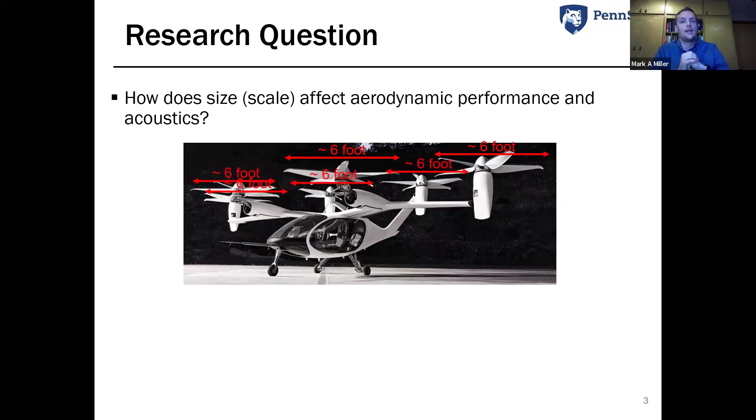If you only have one 6-foot rotor, these are a lot smaller than the typical single main rotor helicopter that we've been studying for decades. And if you just think of it as being a 10 times smaller rotor, it might not seem that complicated. The issue is that you not only have one, but many rotors, and they're all interacting, and that can lead to a lot of aerodynamic complexity.

Things like interactional aerodynamics, where you have one wake being ingested by another rotor. You can also have a lot of unsteadiness in the flow from dynamic stall of multiple rotors, and those wakes can be interacting as well. You can also have things occurring like transition on the blades, and that can change depending on the size that you build your rotorcraft system at. And all of these are going to be in some way or another affected by Reynolds number.

We've decided to really focus in on eVTOLs because it is a bit of an unexplored design space. There are a lot of different configurations out there, and they're all really interesting, I think. I'm a fluids aerodynamics person, so all this complexity has us excited, but there's also a lot of unknowns.

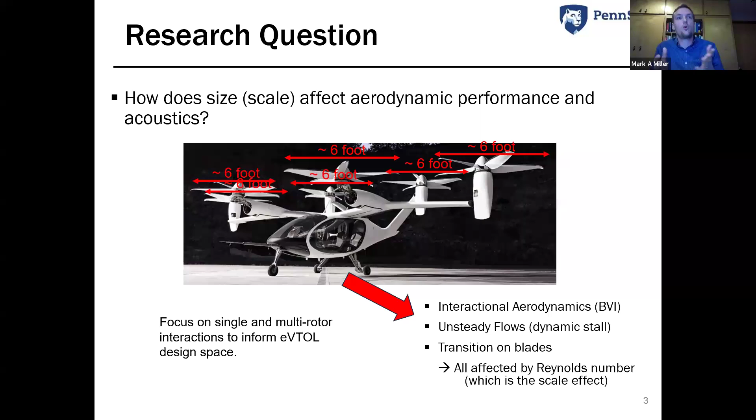So our goal here is to really explore the design space, maybe provide some insight into how the aerodynamics change as you go, especially from model, which is easy for us to build and look at in the lab, to full flight scale. That's the question that we want to answer today. Okay, so that's our motivation.

This is a really brief overview of what I'll be talking about: a little bit about the scaling background and why we're doing what we're doing, and also introducing our new facility. So we'll jump right into that.

There are many things that we want to match when we go to do an experiment. And experiments are very expensive, so we want to match as many as we can, depending on what our objectives are. The three main ones for single main rotor helicopter testing and eVTOLs as well are going to be Reynolds number.

So that's what people typically will call the scale or size effect. Mach number, so these will drive, if you have a high forward flight speed, and also will drive the acoustics that the aircraft generates.

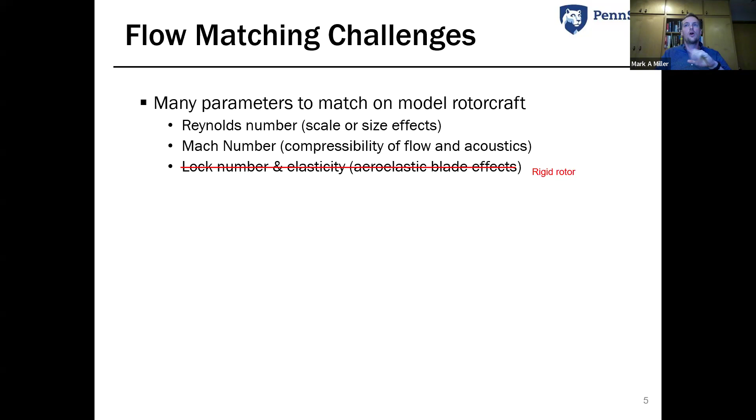And then we're also going to be, if you're doing especially large single main rotors, dealing with things like blade elasticity, lock number, so the inertia of the blade. Today, we're going to simplify because we have limited time, and we're going to focus mainly on rigid rotors for eVTOLs.

If you look back through the literature, this is not exactly an unknown challenge. The Singleton paper from over 20 years ago points this out quite well: it is not possible to match full scale tip Mach numbers and Reynolds numbers if you make a model and test it in air. It's just not physically possible. And even earlier, Keys mentions that if you do have a Reynolds number issue, this is going to be the primary cause of difference between hover performance and model test data.

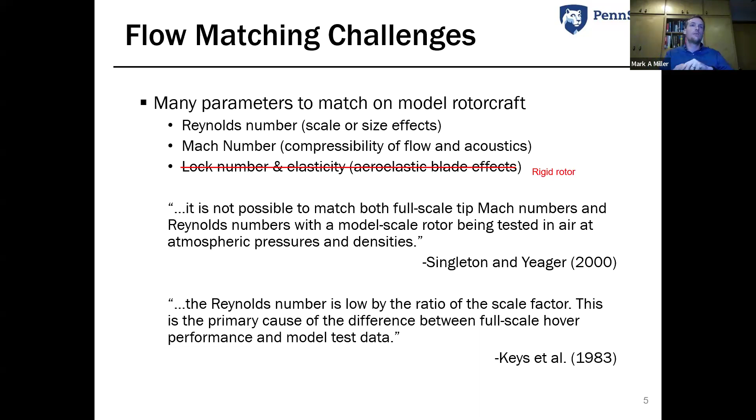Today I'm going to be talking a lot about hover and some limited axial climb cases. These are very relevant to us and well known in single main helicopter rotors.

Okay, so if you're looking at this from a non-dimensional perspective, we're going to have just two main parameters today: Reynolds number and Mach number. Here written in terms of the rotor's important parameters: omega is our rotation rate, R the radius, C the chord. And then we have our fluid properties, rho and mu, and the sonic speed, A.

The problem, as pointed out by previous authors, is that you can't match these simultaneously because they're coupled through omega R, which is just the velocity at the blade tip. If you rewrite Reynolds number, it's just going to be a function of Mach number, your chord, which is a function of the size of your helicopter, and your fluid properties. So we're kind of stuck.

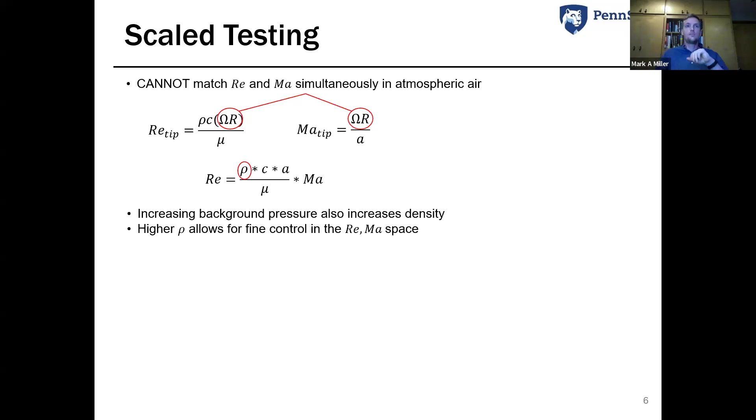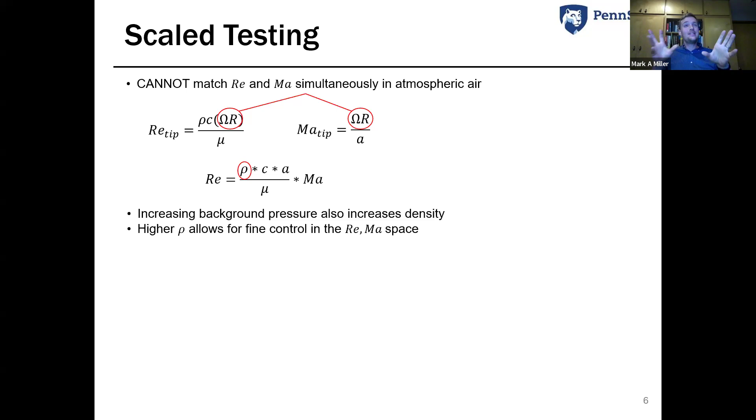And that Reynolds number issue always persists—if you imagine shrinking a rotor down 10 times, the chord has to shrink 10 times too. So you still have this 10 times smaller chord, which causes a problem for Reynolds number, unless we can do something else. If we could somehow change the fluid properties, maybe increase the density while keeping viscosity the same, which is what we can actually do in compressed air, we can now tune Reynolds number completely separately from Mach number. That's a nice tool to have in your pocket.

So just to ground this: let's say we have a little 18 centimeter toy-sized model, and we take that carefully designed model and put it in a high pressure environment. So we increase the density, we increase the pressure—you can think of this like effectively increasing the diameter. If we took that little 18 centimeter model and put it in 6 atmospheres of pressure, a tank full of air with this rotor stuck in there, that would actually be aerodynamically the same as testing almost a 1.5 meter diameter rotor.

And this continues to go up—if we go to 34 atmospheres, that would be about a little over a 6 meter diameter rotor. So for a very low cost, small scale facility with some pressure and a few compressors, we could get much larger equivalent full sizes. Whenever you see pressure or density increasing, you can really think about that as effectively making the rotor bigger aerodynamically, even though we're physically using the same size model. Hopefully that makes sense.

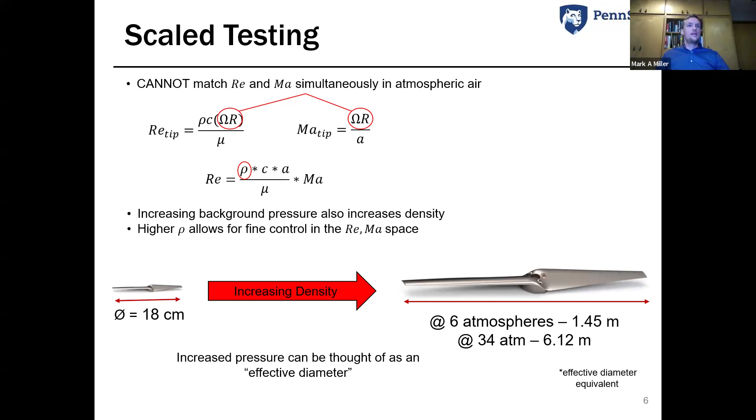And again, this is not exactly a brand new idea—I'll talk a little bit about that as well. But to our knowledge, we're the first people to try this with compressed air. This allows us to achieve proper scaling on the rotor, and we'd like to generate some of these comparison data sets. Unfortunately, we don't have a lot of results yet looking at these interesting eVTOL configurations, but that's coming.

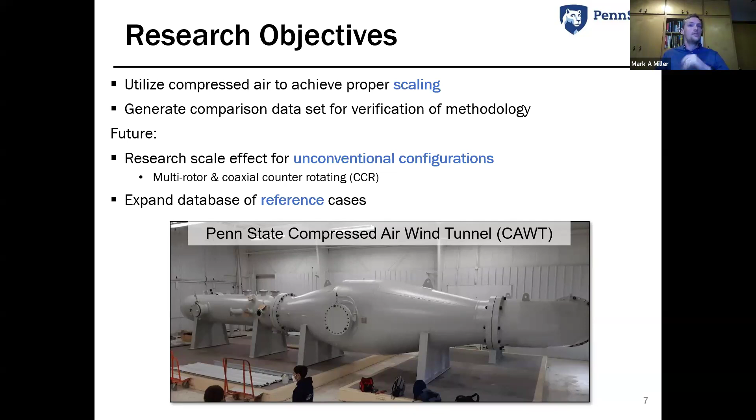We're actually working right now over the summer testing multi-rotor and some coaxial cases. This ability to do these unconventional, strange or unusual configurations is really nice in the lab because it's a lot lower cost and cheaper. This is a facility that we're going to be using to do that, and I'll talk about it on the next few slides.

And the way we run this, it's not a high-speed facility. We actually just fill it with compressed air, and then we circulate the air around in a loop. So it's a single return wind tunnel.

You can kind of see from the students here working on the tunnel, it is, for a university, a fairly large-scale facility. That's nice because we can put fairly large models into it.

Now, all that being said, with our about 1 meter diameter test section and the velocities that we can get, about 45 feet per second-ish, and I'm switching back and forth between units, we can get about 34 million Reynolds number per meter or 10 million per foot.

So, okay, great. Those have million in them. They sound like big numbers. So I thought I would throw one simple example. Let's say you just had a little 25 millimeter, 1-inch airfoil, and you put that inside the tunnel. That would have a Reynolds number of 850,000, which is 34 times what it would have at atmospheric pressure.

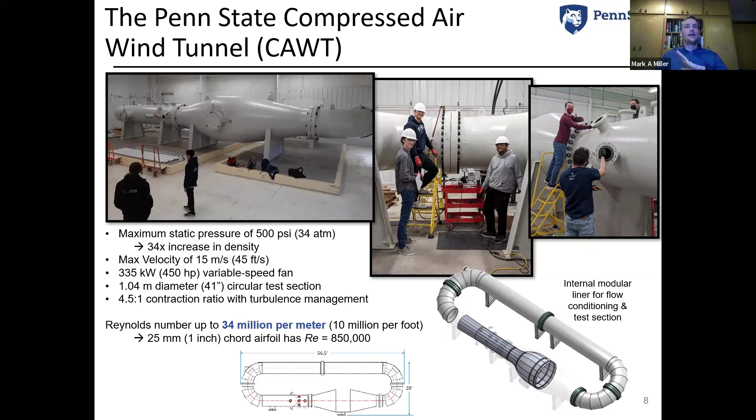So very high. I also thought it'd be interesting if I threw in an example more related to rotorcraft. So let's not worry about rotation yet. Let's just say I take an example large-scale rotorcraft, and I want to shrink that example down so I can study it a little bit more easily in the lab. So I want to take something that's on the order of 15, 16 meters long and make it about a meter long. So it's still a pretty big model, but very reasonable to do in this size facility.

Now, if you wanted to know, let's say, the drag on this fuselage in cruise, at full scale you would need a Reynolds number to match this condition of about 82 million. Now, if you made this 1 meter model and tested it just in atmospheric air, you would only get a Reynolds number of a little under 1 million in this particular case.

However, if you compress the air, we have this 34 times multiplier, right? 34 atmospheres of pressure, then we would get the same order of magnitude Reynolds number as full scale. And that's without using high speed. We're just using pressure to get that, really. So this hopefully highlights the utility of using pressure.

The other cool thing is we can get any scale in between there. So we can go up to something that's really close to full scale, or we can go to small scale, and with the same model, by changing the pressure only, we can basically simulate any size in between. So I kind of call it a spectrum of scales, if you want to think about it that way, going from small to large. Hopefully that makes sense.

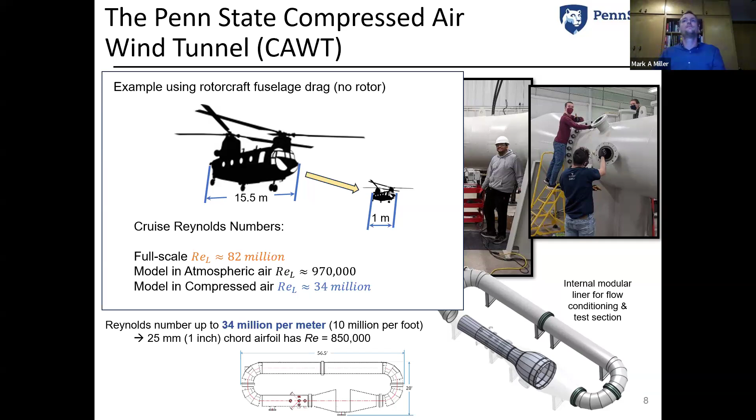Here's just a peek. I know I put a lot of pictures in here, like I mentioned. This is just inside the tunnel. We have a fan, it does spin. We have a test section, like I said, about 1 meter, just with some instrumentation shown. Kind of a look through the contraction.

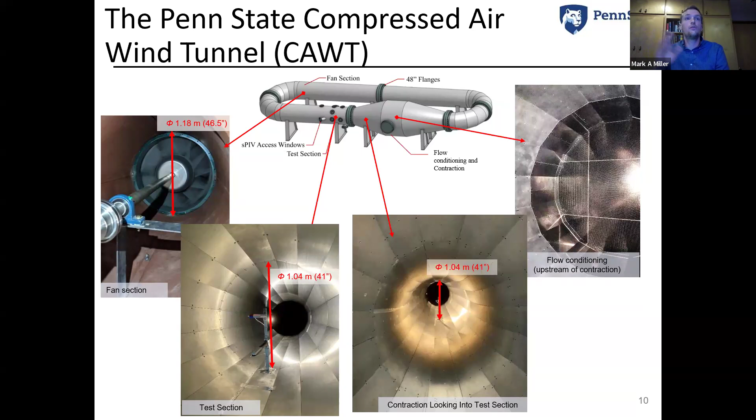And this is all inside the pressure vessel, right? So we've built all this hardware to make sure that the flow is uniform, low turbulence, like a usual wind tunnel should be.

Okay, so let's take a look at some data. We're going to mainly be focusing on experiments that were performed in the test section. We have done some other things. I'm happy to talk afterwards if you're curious about some of the other work we've been doing.

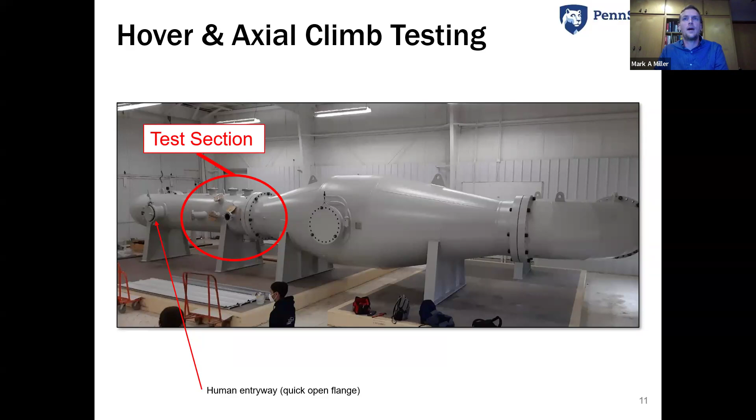If you're also curious about how we get inside, we actually have a little hatch over here, and you have to kind of shimmy your way inside, but you can easily fit, and actually you can easily stand up in this section, which is about 8 feet here. So it's quite a large facility.

So this is the rotor we're going to be looking at. The whole goal of this work, and like I said, this data was taken this year, so this is still very new. And this concept, we wanted to verify it first.

So we took this relatively simple rotor geometry, and I'll explain why we picked this in a second. It's just a 2-bladed, fixed pitch, machined, high tolerance machine aluminum rotor. What I want to point out is it's exactly scaled, so the chord to radius ratio is the same, and the airfoils are the same as full scale.

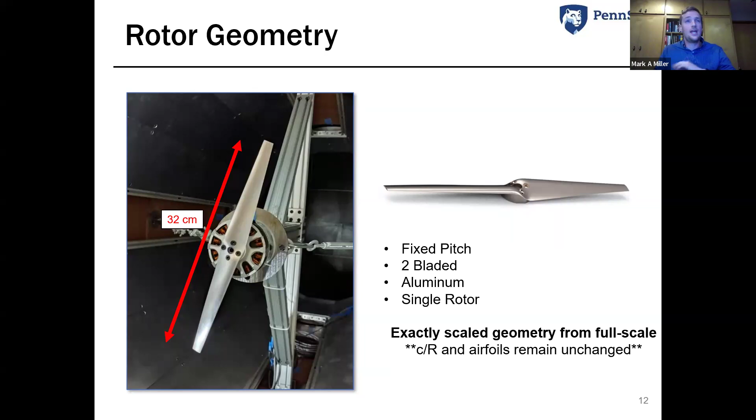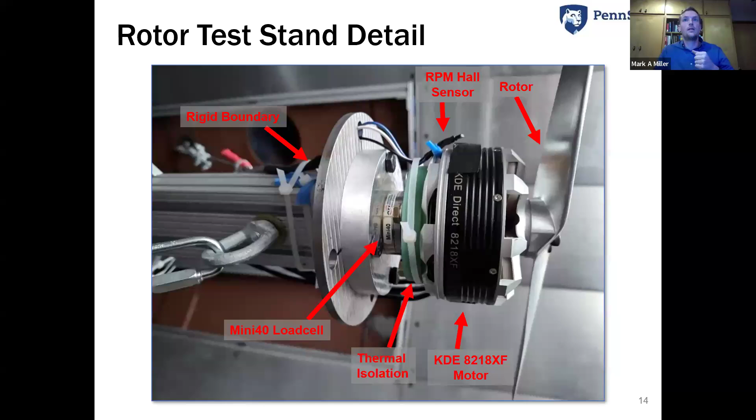This is a picture of it in the tunnel with our test stand. We can measure tunnel velocity, and it's about 32 centimeters in diameter, roughly. This is just a look at our load measurement apparatus. We have a motor that spins the rotor, and we have a load cell that measures the reaction torque, and that allows you to get the power and the thrust that is generated or required by the rotor.

So why do we pick this rotor? There was a good reason. This is actually a NASA project that funded the original development of this rotor, called Dragonfly. And the goal of this project was to build this pretty unique large drone to fly on Titan, which is one of the moons of Saturn.

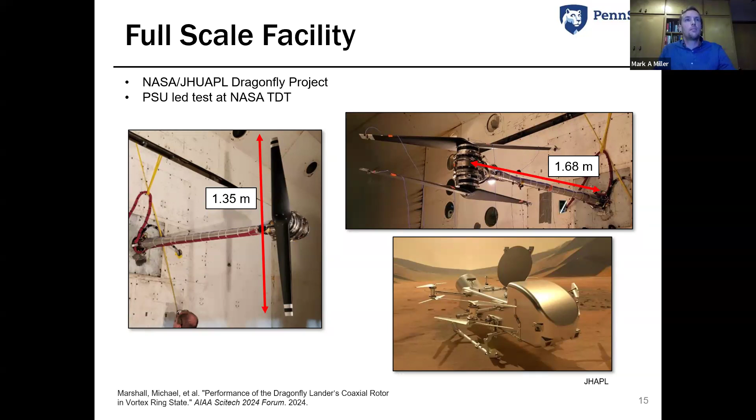And it's a very high density atmosphere there, so it's actually a perfect case for a vertical lift vehicle to very easily generate a lot of lift without a whole lot of rotor. And they did a lot of these tests of this rotor geometry at the NASA TDT facility, and it's all available. So there's not a lot of data for coaxial rotors that's publicly available with a known rotor geometry, so that was why we picked this. They also did a lot of tests with just the single rotor, so it kind of is the perfect comparison case there. They only really tested one of these multiple coaxial configurations.

So let's quickly look through the full-scale data set that's already available. Like I said, they tested all of these different configurations at the NASA Transonic Dynamics Tunnel, and they also tested, which was really cool for us, in 2 different gases. So like I said, we're not the first to think of this heavy gas changing the fluid properties. NASA's known about this forever, since the 30s at least. But they have refrigerant, which has its own benefits, but it's heavier than air, and depending on the refrigerant you use, you get a different boost in Reynolds number.

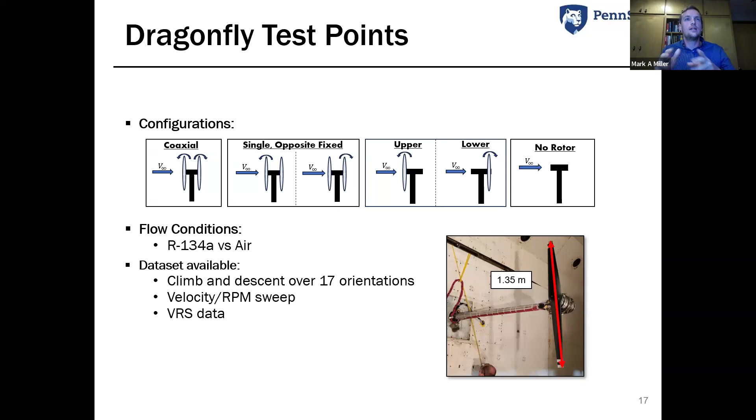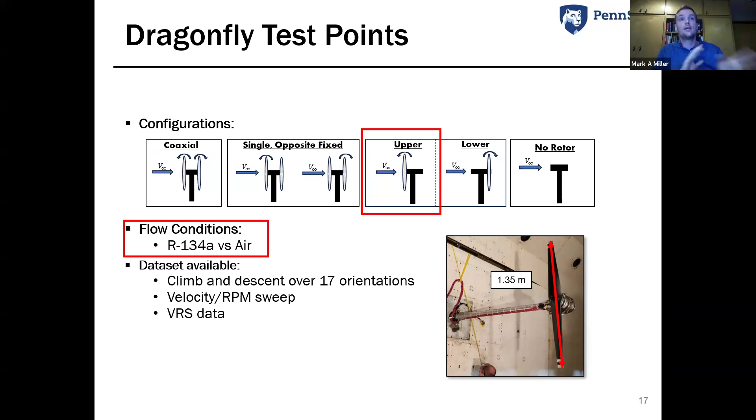Today, we're just going to be focusing on really the single rotor case, and then they tested both in air and in heavy gas. So we'll be looking at their data for this one rotor in both of those and comparing it to our case. So let's dive into that.

Before we look at any actual results, I wanted to orient you with respect to the operating space. So down here on the x-axis, we have Reynolds number, and this is just kind of an idea of the scale that's most relevant to the rotor. So it's calculated at about 75% out from the hub, and that's just kind of dynamically relevant to the blade boundary layer. We can have a whole discussion about Reynolds numbers and why you should choose them, but that's for another time. So we assume that to be the most dynamically relevant.

And one of the interesting side notes, it actually doesn't matter what Reynolds number you pick when you exactly scale the geometry like we have. But anyways, I won't get on a tangent on that. I'll just mention that up here on the leftmost axis, we have Mach numbers. So each one of these points represents an operating point that they tested in the TDT.

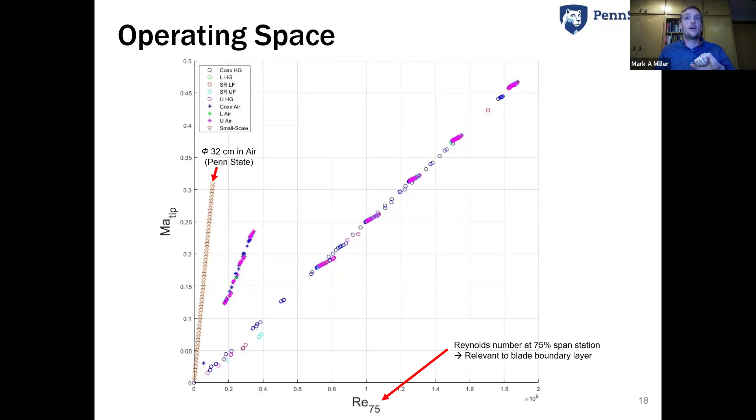And then we've also added in these kind of triangles here where we could operate just at atmospheric air. So if you have a 32 centimeter model, you would see you'd be very limited in your Reynolds number range. We wouldn't be able to even get close. No matter, you could keep spinning this rotor faster and faster, and you still would be very limited, and then you'd be getting into some Mach number effects.

Now, if we also add on the NASA data, so this is the 135 centimeter rotor they tested both in air, so this is kind of the in-between points here, and also the heavy gas.

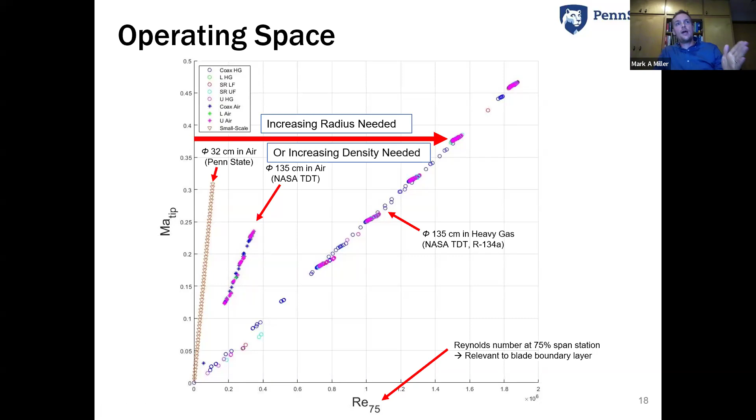You can see that increasing the density of the fluid really does give you a big boost in Reynolds number. That's the only difference—actually the same rotor, just in these two different configurations. As you can tell, to move from the left to the right on this operating space, you really need to either build a bigger rotor or have a higher density working fluid.

So what we can do is, now that we have this pressurized facility—one more note, if you're wondering why these all kind of fall in the same vertical line, it's because all they're doing is increasing the RPM. So each one of these vertical lines is just an RPM sweep, but we've non-dimensionalized everything.

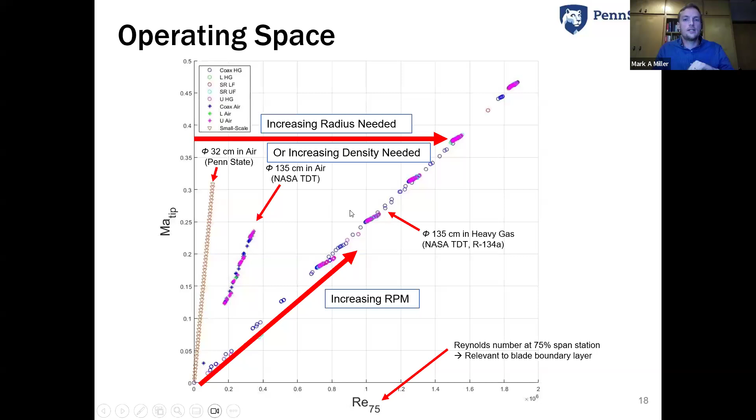Okay, so if we're now going to look at the Penn State facility, what you can see is each one of these lines is actually an increase of 1 atmosphere in pressure. So we're just literally opening a valve, filling another atmosphere, about 15 PSI of air into the tank. And you can see, by doing that with this same model, we're able to actually span a huge range of Reynolds numbers and Mach numbers. This is, like I said, only the background pressure being changed.

And you can see we need about a little over 4 atmospheres to get the 135 centimeter rotor, and about 11.5 atmospheres to do the heavy gas, which is very easy for us. This is actually like the low end of our capabilities.

As an example of that, if we were to pressurize to the max, which is 34 atmospheres, this would be the same as testing an 11-meter diameter rotor, which really you couldn't do except maybe in the world's biggest wind tunnel, the NASA Ames NFAC facility. Like TDT would not be big enough for a 36-foot rotor. So hopefully this kind of highlights where we're able to operate and why.

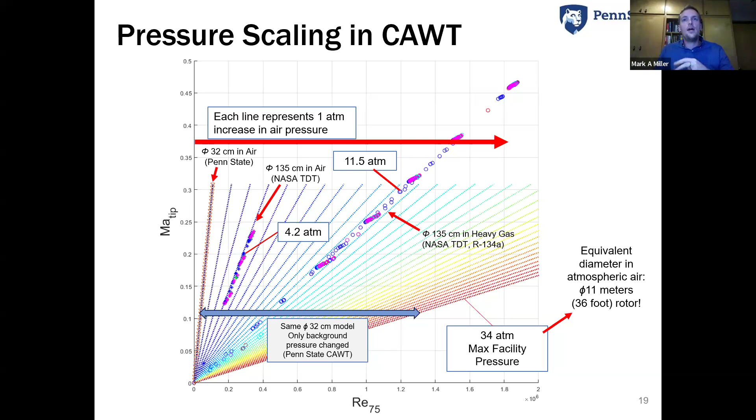And I'll quickly dive into some hover testing. I'm going to throw this data up really quick, and then we'll talk about it. It's a little bit different.

So now we're looking still at Reynolds number, Mach number on the X and Y axis. But what I've done is plotted points, and each one of those points has a color code that corresponds to the thrust value. So this is non-dimensional thrust, which is how we have to compare everything non-dimensionally. And you can see here, each one of these lines is, again, a different pressure, so from 1 to about 10 or 11 atmospheres.

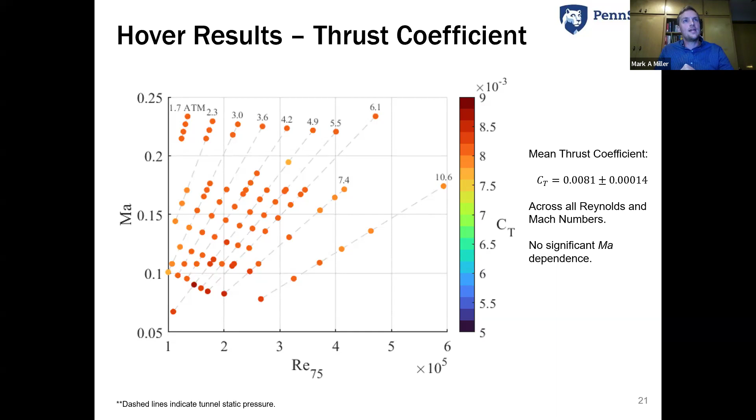And what's interesting is there's actually not a lot of change here. So if you were hoping to see big scale effects to validate the use of this facility, they're not evident, at least in thrust. We also don't really see much change with Mach number as you go from the bottom to the top of this plot. There's not a whole lot of difference here. I'll talk about that in a second and why that's actually what you would expect based on some basic theory.

Now it's a little different if we look at power coefficients. So this is basically how efficiently your rotor is able to produce power, or how much power your rotor takes, right? What's interesting is that the story is a little different here—at low Reynolds number.

So on the left of this plot—I'm not sure if you can see my cursor or not, I won't get too crazy with that—but on the left side of this plot, you can see at low Reynolds number we actually have much higher power that is required. We're up here kind of closer to 9, 10 to the minus 4. However, as you increase Reynolds number, you actually drop off in your required power. This has been a pretty well-known effect, that at small scale you need much more power than you do at large scale or at full scale.

Now, what's also interesting is this levels off at high enough Reynolds numbers. So you get above about the 300,000-ish range for this particular rotor, and there's really not any change. I can throw some numbers up here about how little that change actually is that we've measured, but it is very small. And we also, again, don't really see a huge Mach number dependence. So going from top to bottom here, there's very little change depending on Mach number, which you would expect, right? We're at very low tip Mach numbers, maybe lower than what some of you are even used to. So we're very much in the incompressible regime right now.

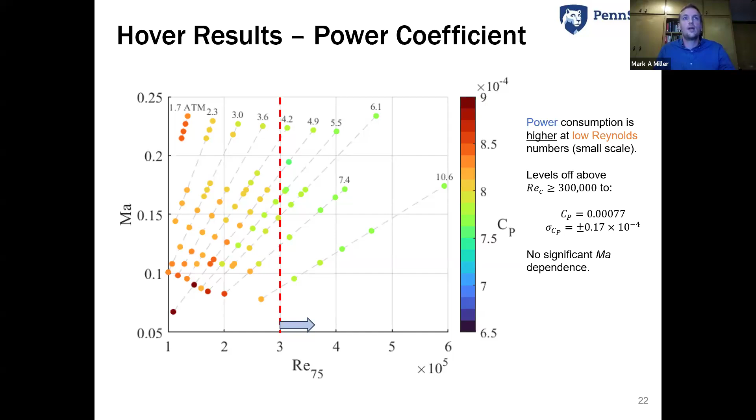Okay, so I'm going to briefly go through the momentum theory. If this isn't your thing, feel free to tune out. But really, it's just cracking open your favorite rotorcraft textbook. Here I have a copy of Leishman, always sitting on my desk.

Let's say we're just trying to explain these trends we saw - not much change in thrust and a little change in power. Let's just try and estimate what we would be operating at for this rotor. So for an eVTOL style rotor, pretty high solidity. I threw some numbers in here. We get a straight bladed pitch.

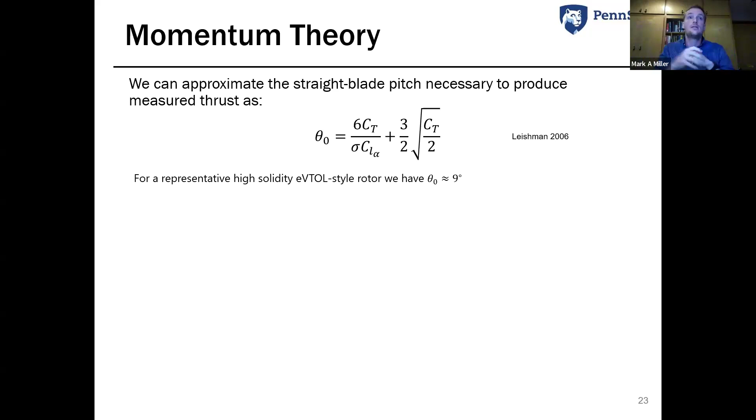We're not even twisting the blades, which is what these... let's not get too much into the details. We're just going to estimate, right? Back of the envelope. A pitch of about 9 degrees.

If we dive a little bit deeper and say, well, how is thrust and power generated on the rotor? You need a little bit of blade element to get some insight into that. But basically, each little piece of the blade contributes its own amount of thrust and power. You can break that down into the individual lift and drag components, which is just 1D momentum theory, and the blade element part of that.

And you can see you get this kind of dependence. We have lift and drag coefficient, and then that depends on phi, which is kind of like the flow angle, which is made up of alpha, the angle of attack, and the relative pitch angle.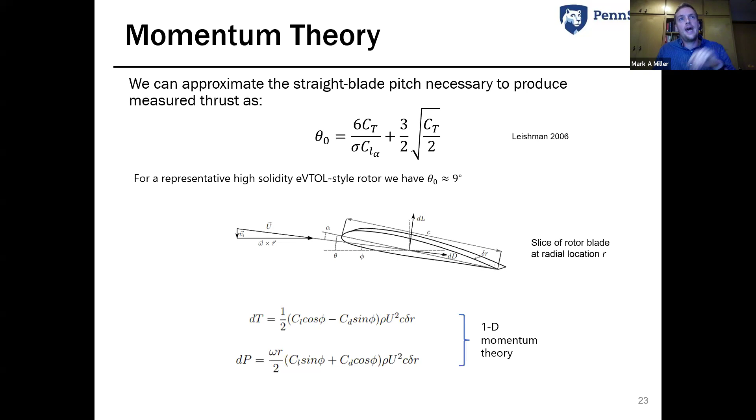So we calculated that. Now, what's nice is that in hover, we can really simplify things. We can basically say phi is very small because the only velocity we have is any induced velocity, because the rotor creates a small pressure difference. And that means we can simplify our thrust, and now I've written it as a coefficient. That just helps simplify things a little bit.

You can see we have some geometry dependent terms. We have delta R, which is just the slice width, and then we have the radial location R, and sigma is just our solidity at that location, and then lift. So really, what this is saying is our thrust coefficient, in hover at least, should only depend on lift, and any changes in lift that are dependent on Reynolds number.

Power is a little different. Because CL is generally at least an order of magnitude bigger than drag, usually more, but you have a small value of phi because inflow angle is small in hover, those two terms actually kind of fight each other. So this phi, CL, and CD are actually in competition. So we would expect that if there are changes in CD, the drag coefficient, it's going to really show up in power and not in thrust. And that's actually exactly what we saw.

So if you look at some airfoil data, what you'll see is generally if you're at a not stalled condition, which hover isn't, at least at these idealized pitch cases, you're not going to see much change in lift, but you may see some change in drag. So again, this is why we would expect to see changes in power, but not thrust maybe. Lift generally, there might be some small changes you could pick up, but the big changes you're going to see are going to be in drag.

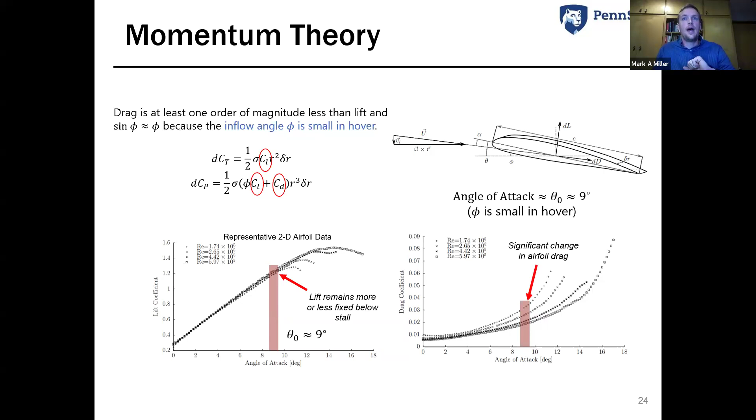And so lift remains more or less fixed at our given angle. And again, angle of attack here is about the same as theta, just because we're in hover. And that's exactly what we saw, right? So this is just those two plots from before. Very little change in thrust, a definite dependence in power.

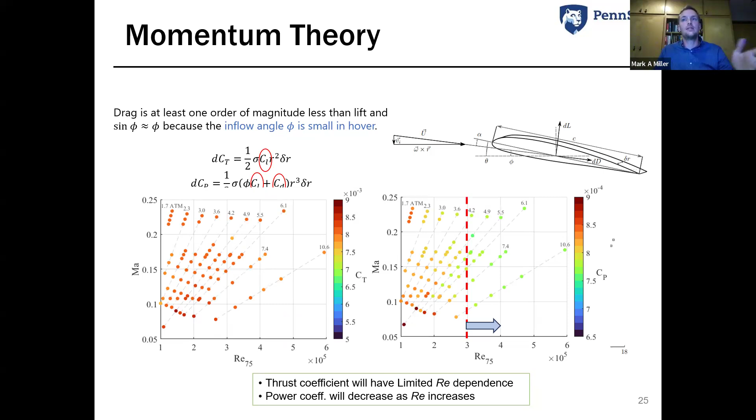And if you look back at this airfoil data, you'll see as Reynolds number increases, you actually get less drag. And that's due to some complicated transition happening on the airfoils. But what's cool is you can kind of see that effect in aggregate on the whole rotor. And we can pick that up very easily with this data set.

Okay, so let's talk about axial climb. And I won't have as much theory in here, I promise. We did do a limited range of axial climb cases. And the reason we did this first was basically with the stand we have, it was the easiest configuration for us to test in. Like I said, ongoing work is expanding this.

But for now, we're also only going to be comparing to NASA cases that are in a similar range of mu and Mach number. We also identified earlier that Mach number effects are not really that significant, so we're going to ignore them - we've done the analysis, they don't really play a role here. So for clarity, I'm just not going to denote the individual Mach numbers, but those are still changing.

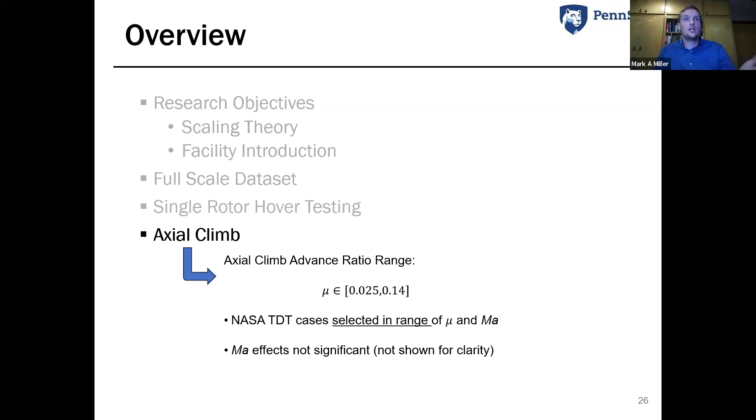They're just not playing a critical role in the performance at these cases.

There is a lot more unsteadiness at low Reynolds number. So like we said before, transition on the airfoils, dynamic stall might be changing if it's happening. In this case it probably isn't, but any of those weird transition effects, the boundary layer is also very sensitive to any other things going on in the flow, like turbulence or roughness. So any of those little things, or some temperature change or whatever, can cause transition at low Reynolds numbers, which is kind of why it makes it very tricky to measure there.

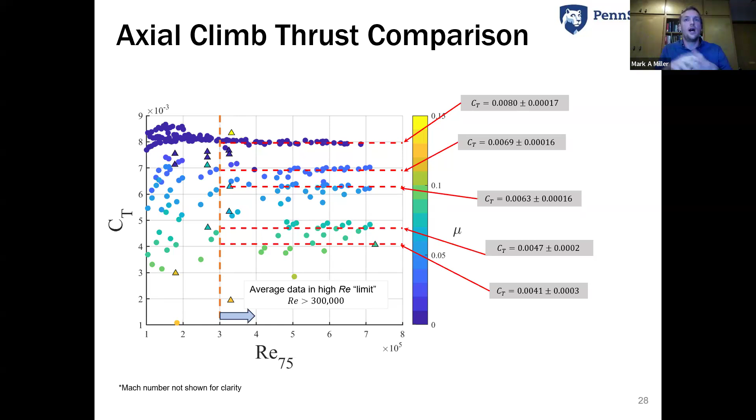You may actually be able to observe this Reynolds invariance. And what's happening in the flow is the Reynolds number is high enough where you fix transition and your inertia effects are kind of dominating. So that's kind of another neat feature of this flow.

You also notice the standard deviation of the NASA data sets is going to be a little bit higher. Again, it's just a difficult regime to measure. Their setup wasn't really designed to do this. But I think it just shows that there's an operating space where doing compressed air testing can be very enlightening, before or in concert with doing other tests.

Now, what's interesting is we do see this decreasing trend in required power as you increase Reynolds number, and it really does hold for all advance ratios that we tested. So for this particular rotor, this is probably a fairly universal phenomenon, at least in hover and axial climb, that you generally will need less power as you increase Reynolds number.

And we can do the same thing. We can say, let's establish a cutoff Reynolds number, and above that, we're going to call that the high Reynolds number limit. Now, you could argue over where that should be—maybe 400,000, 300,000, 500,000. The nice thing is you have enough data points here that you could pretty objectively, not super subjectively, identify what your cutoff is, and then see what this sort of spread looks like if you assume that cutoff Reynolds number value.

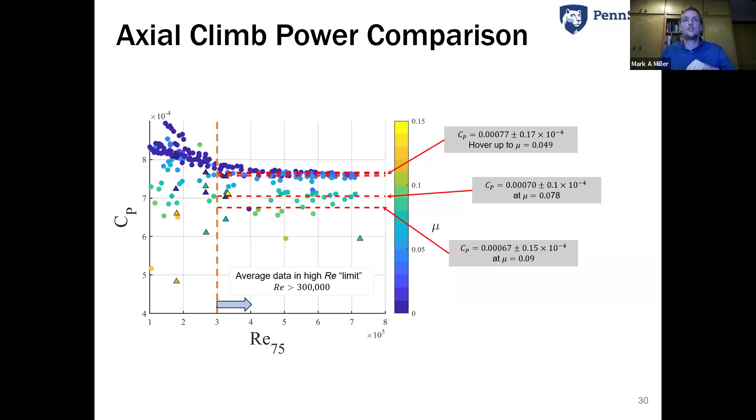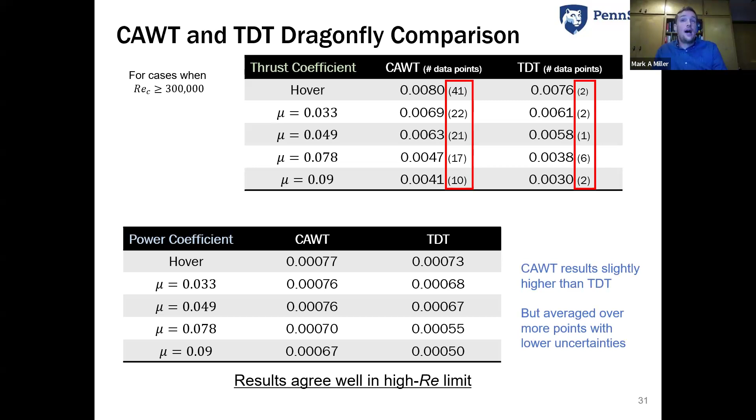And again, we're not trying to say the TDT data is bad. They were really interested in some axial climb cases and other cases, especially the very high Reynolds number. We were really interested in scaling, which all happens at the difficult end of the spectrum, from that few hundred thousand to maybe a couple million Reynolds number. And within that range, we agree very well with their data. Our data is slightly higher on average, but again, that may be due to some of the uncertainty in the measurements.

Okay, so some conclusions real quick. The compressed air testing has been verified for the single rotor case against this really neat air and heavy gas data set, which also used the same concept, just at a larger scale. And we clearly saw the scaling trends, so the Reynolds number dependence in the CAWT result, that were not available from the TDT results—we were able to pick those out.

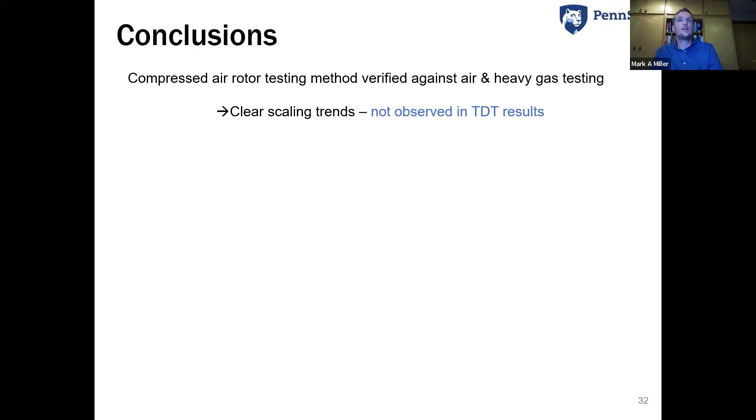What was also a little bit funny about this test is the Dragonfly rotor. If you read the Marshall paper that this data is from, which I think I cited earlier—if not, I can throw that up later—they designed that rotor to not be sensitive to Reynolds number. So we picked a very difficult case to compare against, and it appears that rotor achieved its stated design goals. There wasn't any measurable change that we could detect when Reynolds number was above about 300,000, and only small increases were required if you go below 300,000.

About 15% additional power is generally required below a Reynolds number of 300,000, and your thrust you can expect to basically be the same. So this actually is a pretty good candidate rotor for small scale testing if you would like to do that sort of thing.

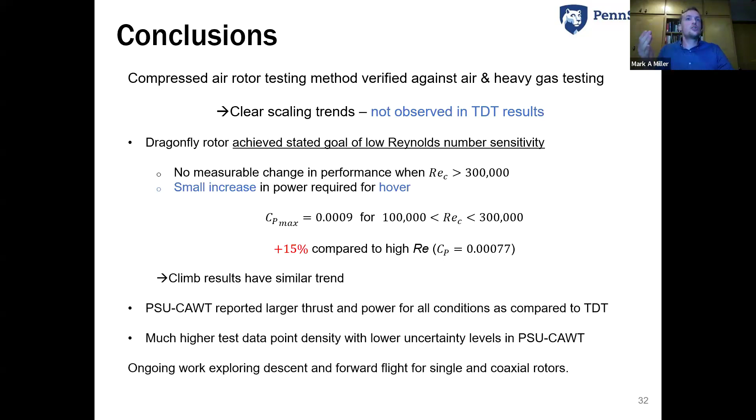We also found that for axial climb, these results generally hold. The trends are basically the exact same within our experimental uncertainty. We did measure slightly larger thrust and power, in all fairness, and we do have much higher data point density and lower uncertainty levels, just because of how the experiment was designed.

Like I mentioned, we are continuing to explore this testing method for descent and forward flight, so keep an eye out for that data. We're hoping to maybe present it either at the next VFS or the next AIAA Aviation—it just kind of depends on timing. So keep an eye out for that.

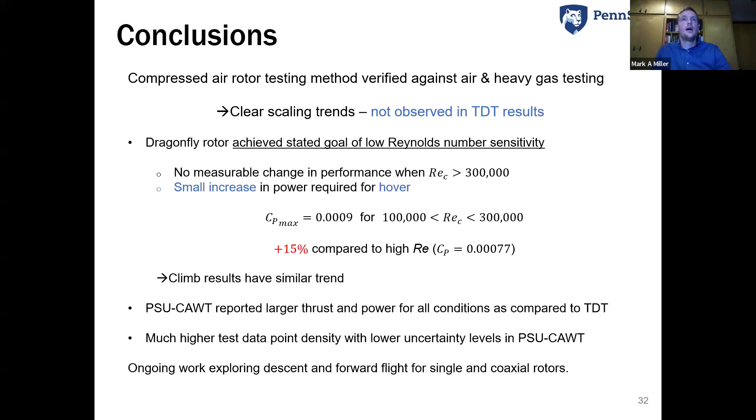And I wanted to also quickly show mostly pictures of some other ongoing work that we have at Penn State before I take some questions, just because I think it's cool, and hopefully you will too.

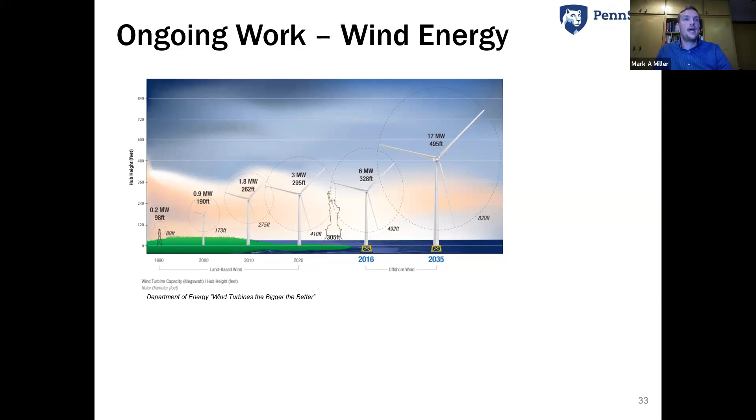We have this interesting problem in the wind energy field, also rotor-related, rotor-driven field, where rotors are getting absolutely enormous. It's projected that in a little more than 10 years, we're going to have rotors that are almost 500 feet in hub height. Those are absolutely enormous. And the question is, for really any of these rotor sizes, how do you scale this down and study it? It's kind of the same problem we have for rotorcraft. How do you effectively scale something down? Because it also has a rotational dependence.

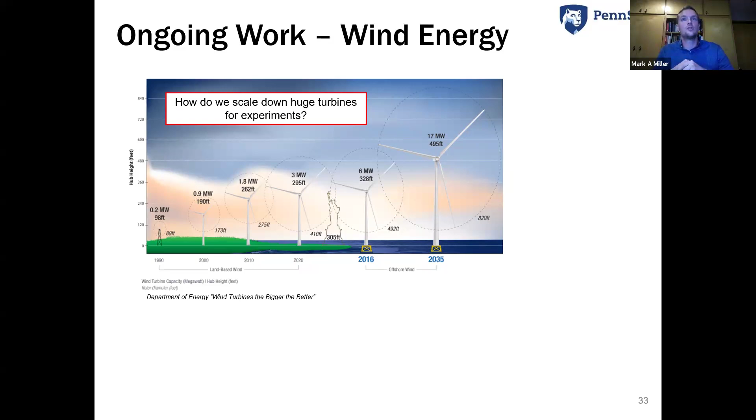And even with compressed air or the world's largest wind tunnel, we actually wouldn't be able to achieve these conditions. So this ongoing project is trying to figure out a physics-based way of scaling the wake. And this was really performed by a colleague of mine, Dr. Sven Schmitz, and his PhD student, Desirae Major, who has since graduated.

And the cool thing is, if we could scale the wake properly, this is now looking behind the rotor, not just at power and thrust, but what happens downstream of that. And this is important if you're laying out a wind farm, right? It could be important also for rotorcraft if we have these multi-rotor interactions. And they have done a lot of really neat computational fluid dynamics and published a paper, which I'd be happy to send you, on how you scale these wakes so that they're exactly the same in the mean velocity. So this is kind of a neat way of looking at the rotor from kind of an induced power perspective.

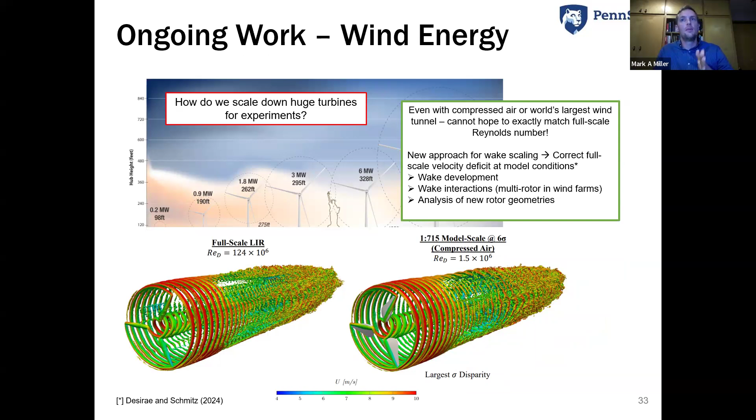And we're going to actually be doing some experiments in our wind tunnel to verify their simulations. So they've designed this rotor. It looks kind of funky, but it actually has the same wake velocity profile as the full scale several-100-meter turbine. So the full scale has this enormous Reynolds number, and we're still pretty high for a wind tunnel experiment, but we can't get to 124 million. But interestingly, if you plot the velocity profile behind this rotor, it looks basically exactly the same.

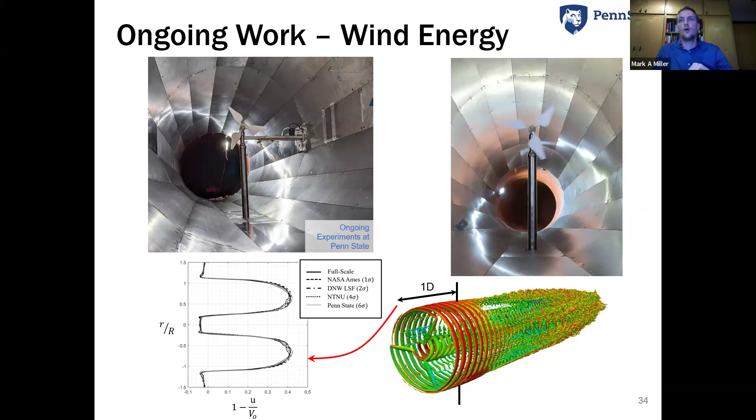So some ongoing work is that we're actually measuring - these pictures are actually from this week. So it's been an ongoing project to spin this rotor in our tunnel and then measure some wake profiles behind it. And we think this could have some interesting impacts and applications for rotorcraft people who would want to create a scaled wake behind a rotor. And actually it was inspired by some work that's been done in the rotorcraft field. So happy to talk more about that if you'd like.